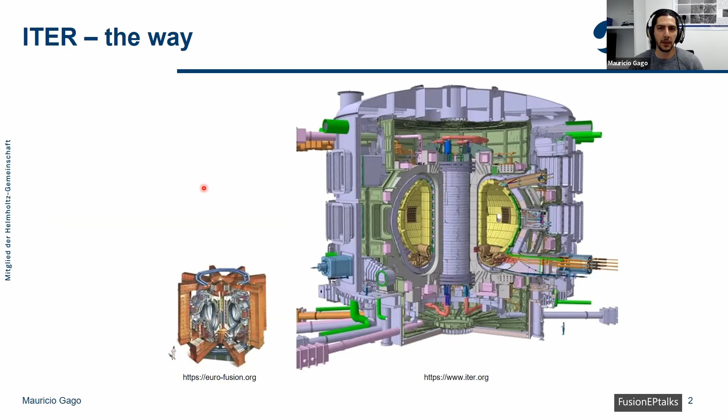And it is expected for ITER to produce 10 times more fusion power than the heating power it consumes, being the first reactor to have a net power gain.

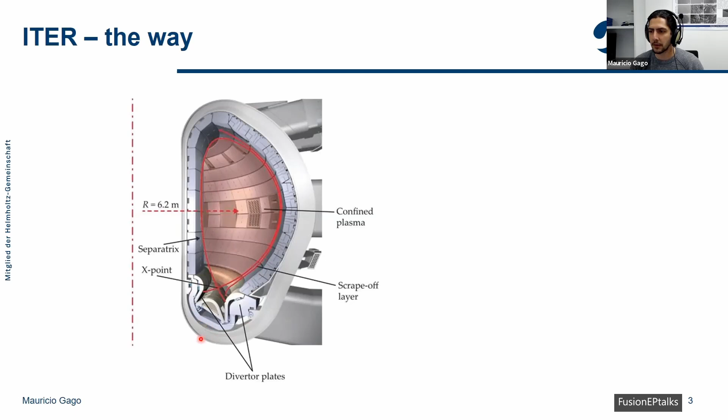Inside the reactor, we will have the plasma being contained, which will be at around 150 million degrees Celsius. In order to regulate these heated particles inside the reactor, the magnetic field will be configured such that excess particles and heat can be extracted by causing them to hit the zone here, which is known as the divertor. This will cause the divertor to be the area where the plasma-facing materials are exposed to the highest loads inside ITER and inside most reactors, in fact.

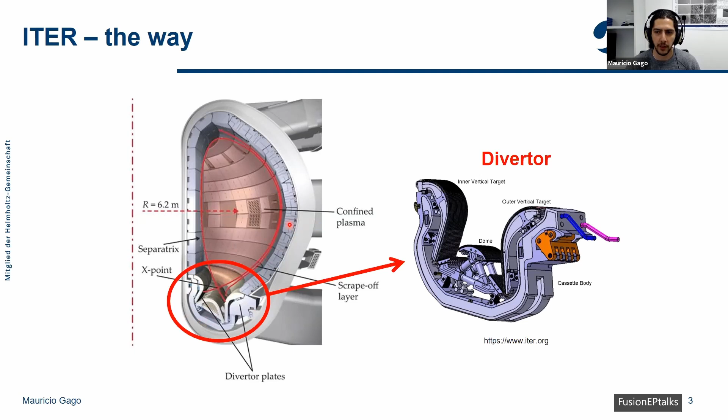Because of this, we will have very high loads. And this requires the material used for this, the plasma-facing material as it would be called, to comply with strict requirements, such as, first of all, having a high melting temperature and a high thermal conductivity, having a low tritium absorption and sputtering yield, being available and not being too expensive, such that it would be prohibitive. And also not producing any long-lived transmutation products, which is also important.

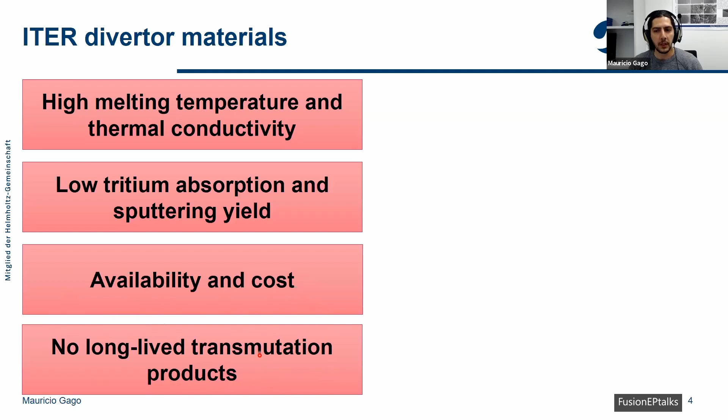This is so that we don't produce as much radioactive waste as possible, and that we can also store it only for 100-200 years, and then it can be reused. Of all the available materials, tungsten is the only one to comply with all these requirements, and it is therefore the material chosen as plasma-facing material for the ITER divertor.

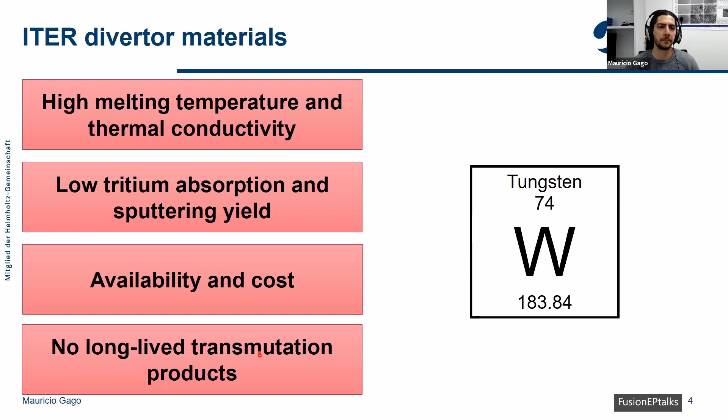So once inside ITER, we will have very high heat loads. ITER will function in pulses, basically of around 450 seconds. During these pulses, we will have slow transient events, which will have from 5 to 20 megawatts per square meter of power density. And then we will also have regularly edge-localized modes, or ELMs, of up to 1 gigawatt per square meter.

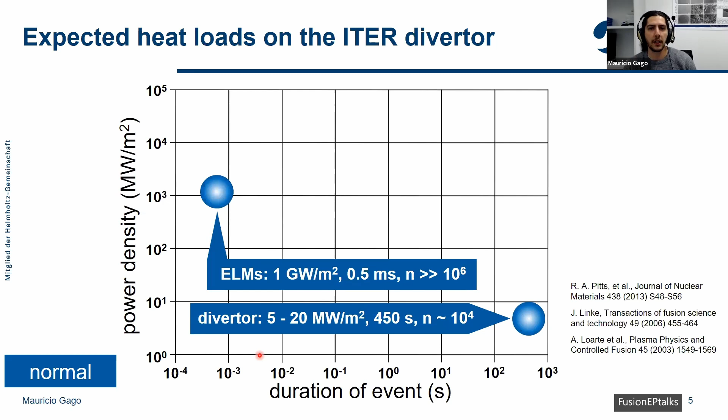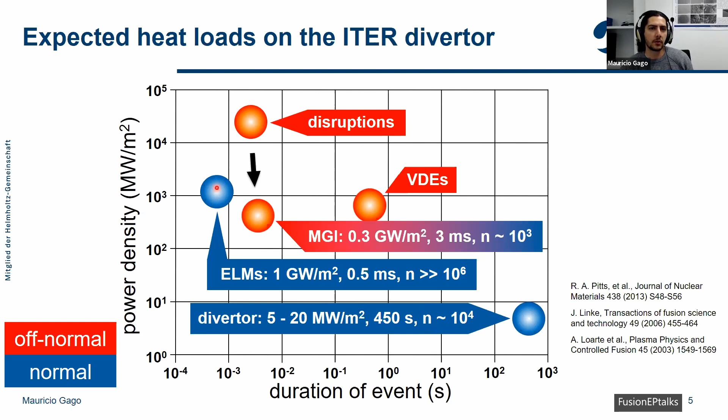It is expected for there to be millions of these events during the lifetime of the divertor. Also, some off-normal events are expected to occur, such as vertical displacement events and disruptions seen here, which can also be mitigated in some ways. But for now, we will concentrate mainly on the ELMs, which are expected to be the loads that will affect the divertor the most.

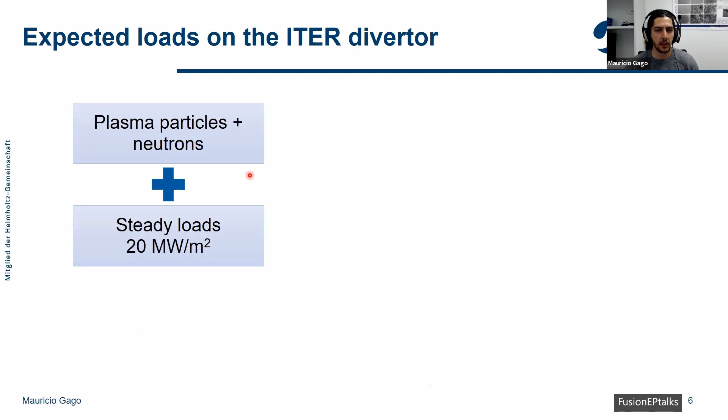I like putting these numbers into perspective. First of all, we will have highly energetic neutrons and plasma particles that can modify the lattice structure and the composition of the material. Aside from this, the slow transients produced during normal operations in ITER will subject the divertor to up to 10 times the loads as in a spaceship re-entering Earth.

Additionally, we will have the transient loads that I mentioned before from the ELMs, which will increase the surface temperature by more than 1,000 degrees in less than 1 millisecond. So these are very, very high loads that we're expecting the material to sustain.

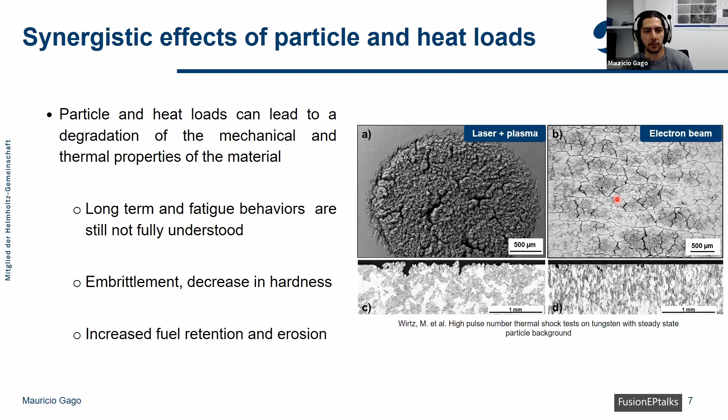So to better understand how PFMs, or plasma-facing materials, in the ITER divertor will be affected, we need to simulate the conditions inside the reactor as realistically as possible. But up till now, no device can completely simulate the loads expected in the ITER divertor. But we can get close, or at least as close as possible.

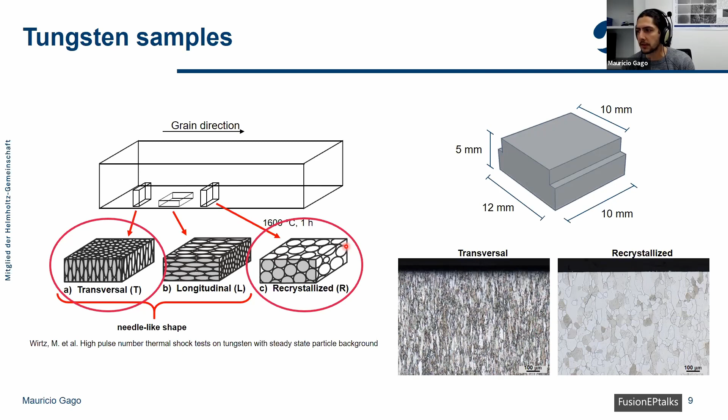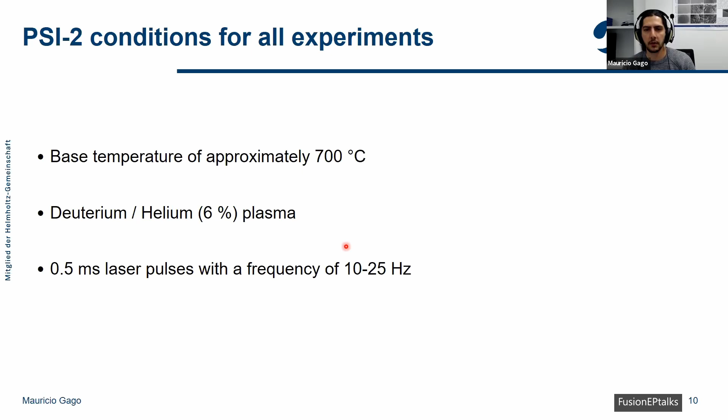So I would now like to give you an overview of the effects of ELM-like events on the material, depending on the power load applied. This will be done simultaneously with the plasma loads first.

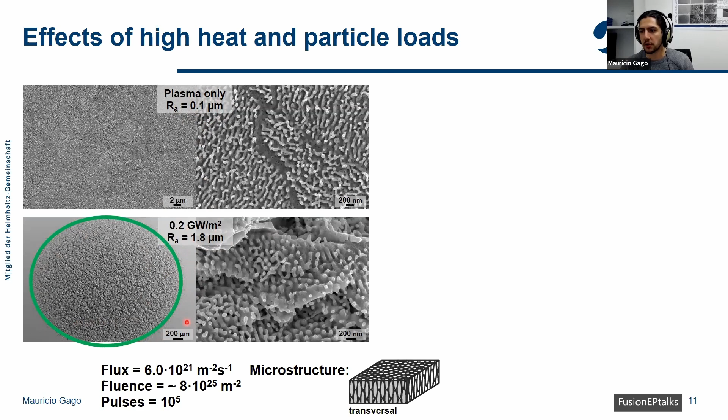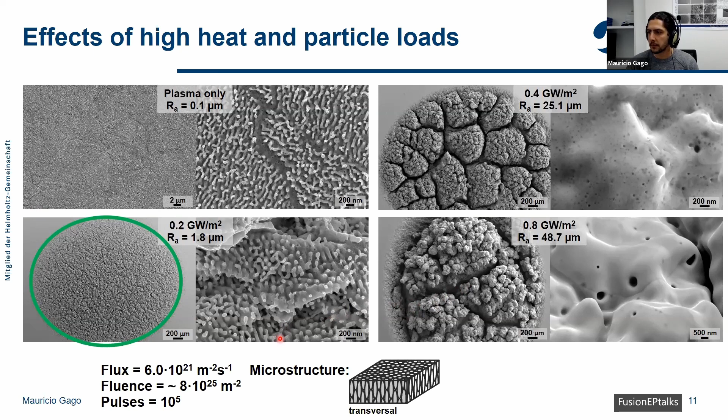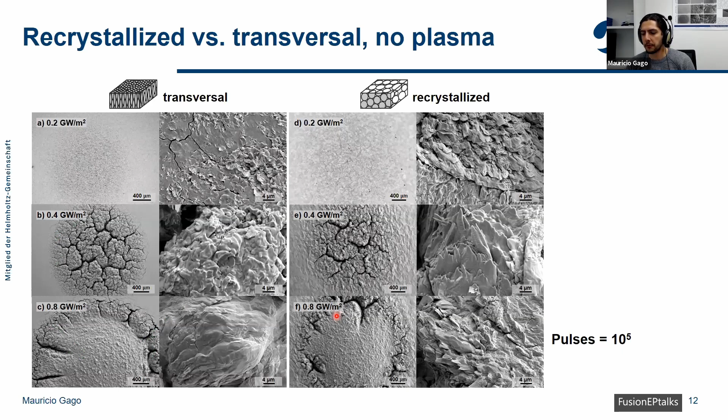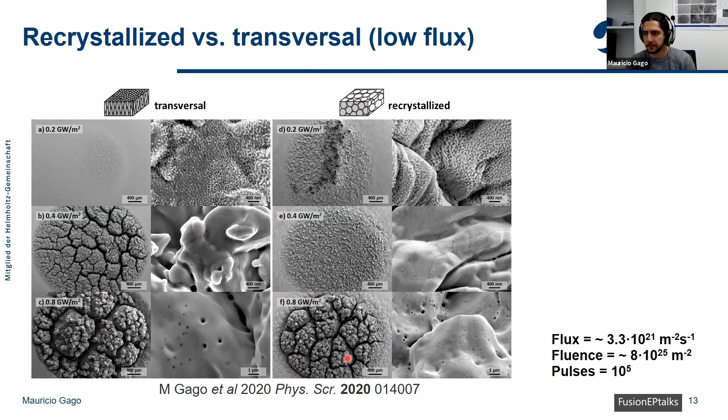If we increase the plasma flux, we see other effects taking place. Comparing high flux and low flux exposure is very important, because in ITER, the total fluence is expected to be several orders of magnitude larger than what we tested with these samples. This means any effects from plasma exposure should be exacerbated during full DT operation, that is, deuterium-tritium operation.

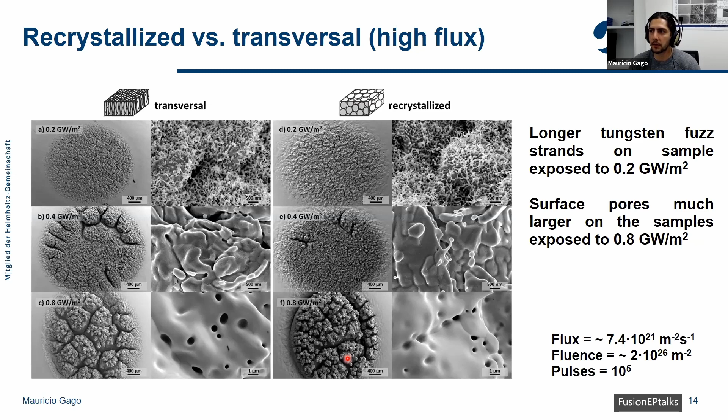This means once the reactor is actually functioning at its full capacity. But we can already see some differences between these two fluxes or fluences, so let's compare them more closely.

We see that at the lowest power load, comparing low flux and high flux, the fuzz formed is actually much higher, or at least much longer, for the high flux samples.

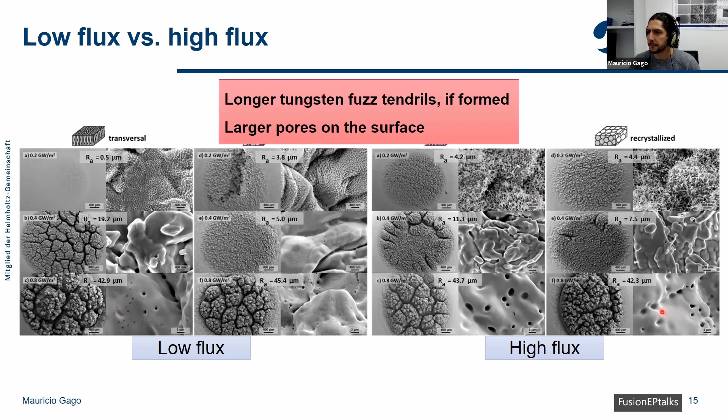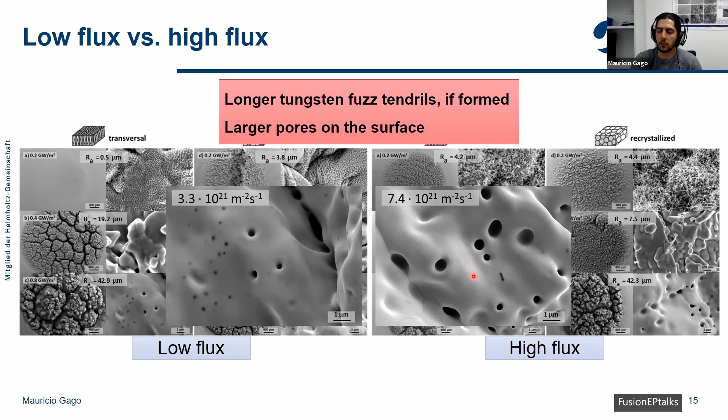At the highest power load, comparing the size of the bubbles or pores being formed, we see the pore size is much larger with higher flux. This means that if the fluence is several times higher in ITER, the pores could be expected to be even larger, which is an important factor to consider when analyzing how the material will behave.

Another process taking place during the tests is recrystallization. As I mentioned before, it is expected in the PFMs, and we can see that during these tests as well, on the areas affected by laser, recrystallization is taking place, and this does not happen in the areas affected only by plasma, for example.

So it's merely an effect of the heat loads, especially that the areas affected by the laser at higher power loads, 0.4 and 0.8 gigawatts per square meter, the surface temperature increases, and at some point during the temperature peak, the temperature of the samples is higher than the recrystallization temperature of tungsten, which is about 1,300 degrees C.

We can see there, also because of the plastic deformation taking place during this expansion and contraction, different effects taking place, such as grain nucleation, plastic deformation, and also recrystallization. So we see a lot of smaller grains being formed in both samples, and then also some larger grains being formed, especially on the surface, even at the lower power loads.

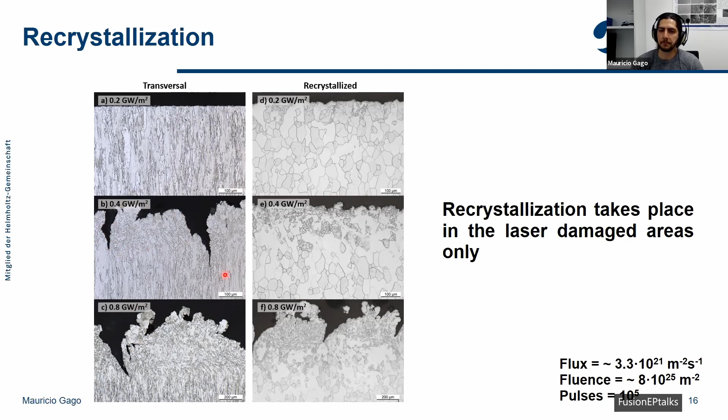Now, as I mentioned at the beginning of the presentation, the amount of ELMs expected for the ITER divertor during its lifetime is in the millions of events.

Up till now, I have only shown a number of pulses of 100,000, but then it's also interesting to know how PFMs will behave after a higher number of ELMs.

So also due to time limitations, the frequency of the pulses had to be increased, and because of this, if a higher power load was applied, the temperature of the samples would increase way too much, even the base temperature, so this wouldn't have been able to stabilize.

And then a power density of only 0.2 gigawatts per square meter was used, so only the lower power density that has been used up until now, for these high pulse number tests.

But still, this is very important because one of the plans to mitigate the effect of ELMs is by ELM pacing, which means that ELMs will actually be happening more often, at a higher frequency than for unmitigated ELMs, but they will have a lower power load.

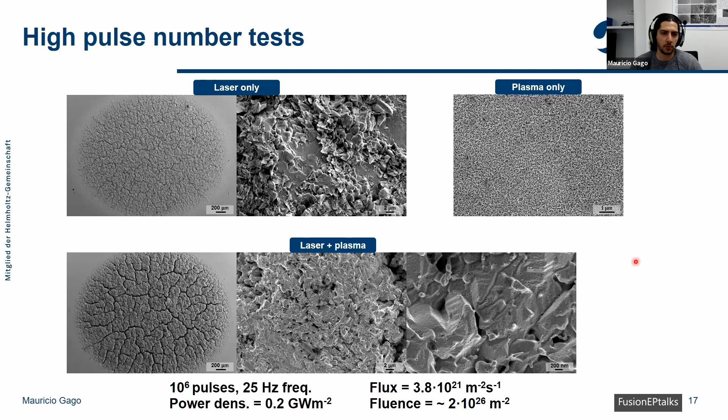But then again, also this time no tungsten fuzz was observed, for example, and no really large cracks were observed as in previous tests with higher power loads.

Now, another phenomenon that was observed that I think is very relevant for PFMs in the ITER divertor is that of bubble formation. So on the surface, for the samples exposed to plasma, we could see that there are pores being formed. And if we perform a focused ion beam cut of the samples, we can see that there are bubbles being formed also underneath the surface.

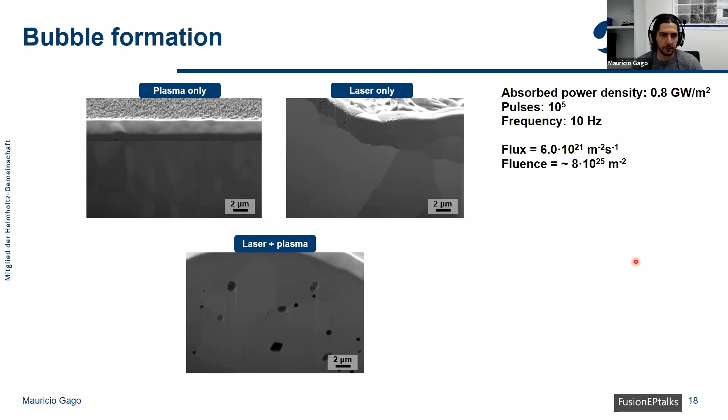And we can see here that this doesn't happen when we apply only plasma or only laser, so this only happens when we apply laser and plasma. And as we will see later, in the samples exposed to 1,000,000 pulses even, we also don't see any bubble formation here.

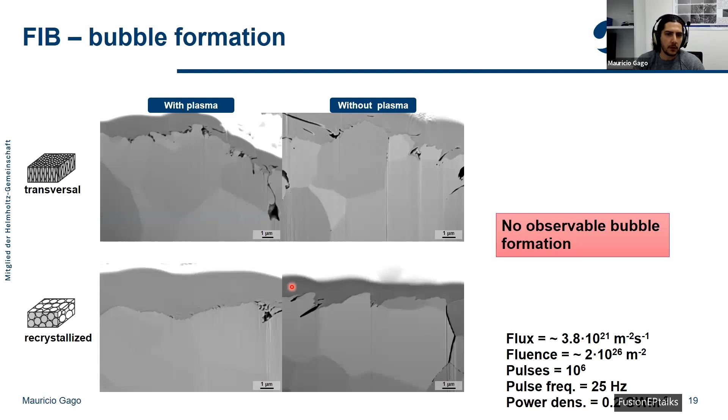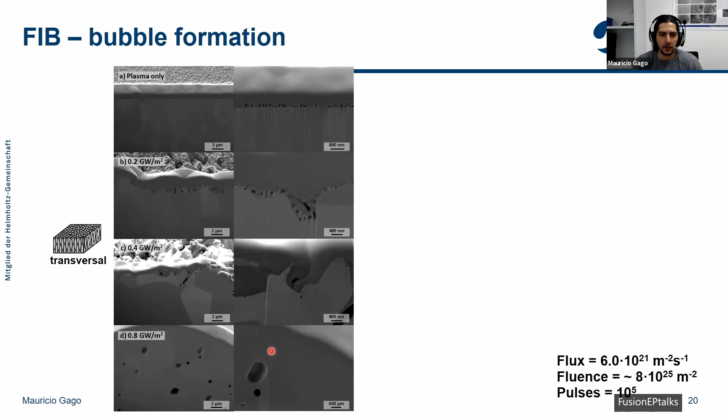And we can expect the size to be even larger with a higher plasma fluence. As we saw, the pores also increase in size, so I would say that most probably the size of the bubbles also grows underneath the surface with a higher fluence.

In these samples, we can already see that the amount of bubbles on the surface is very significant. Actually, analyzing this image, for example, we see that the bubbles occupy 3% of the analyzed area.

And how this affects the material behavior is still not completely clear, but if we have more pores, this will at least affect the heat dissipation. And this is already very important because then the surface will always be warmer than expected.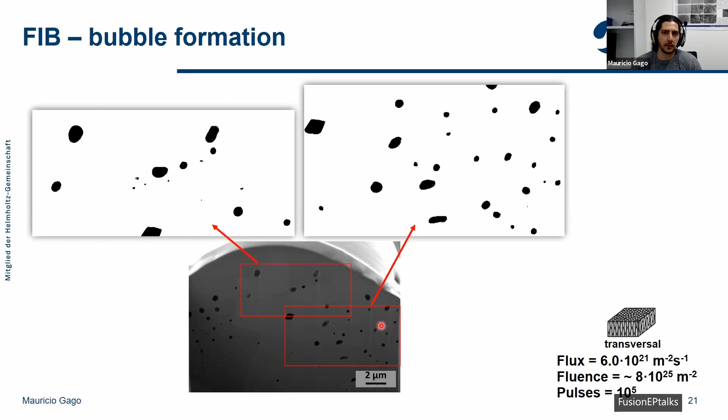So as I mentioned at the beginning, we saw that for some samples, especially at lower power loads, the transversal samples have a higher cracking threshold than the recrystallized samples. This has also been seen in previous tests.

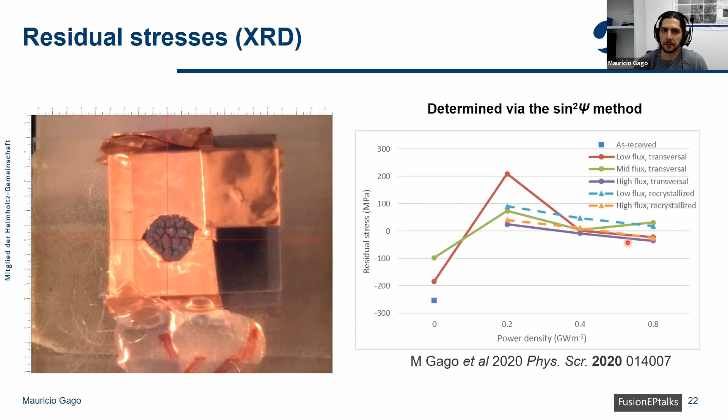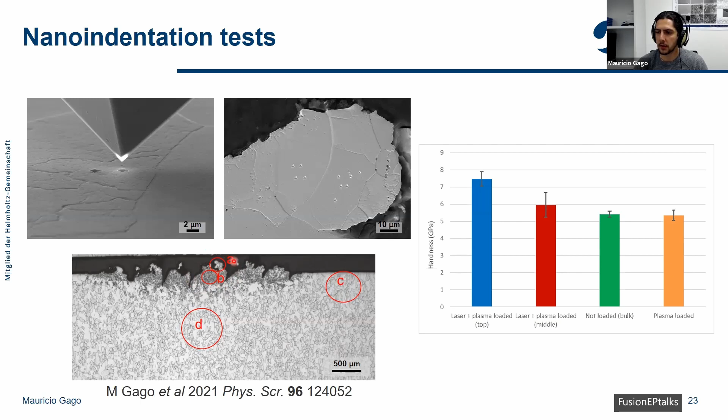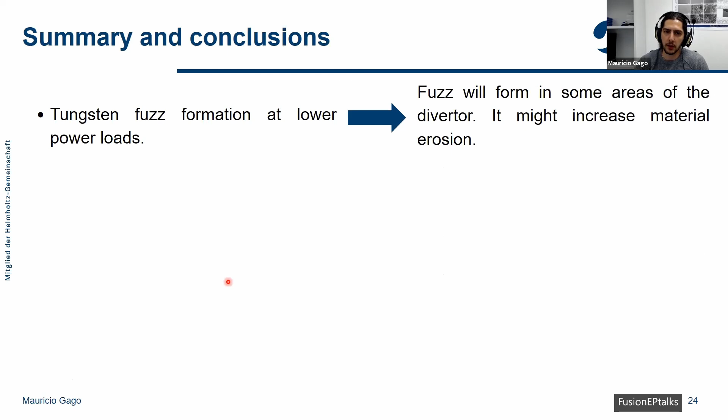So to conclude, we expect tungsten fuzz formation at lower power loads. This means fuzz will form in some areas of the divertor, and it might also increase material erosion. Then high heat loads increase surface temperature and allow bubble formation, and plasma fluence increases bubble size, so bubble formation should be expected in the divertor.

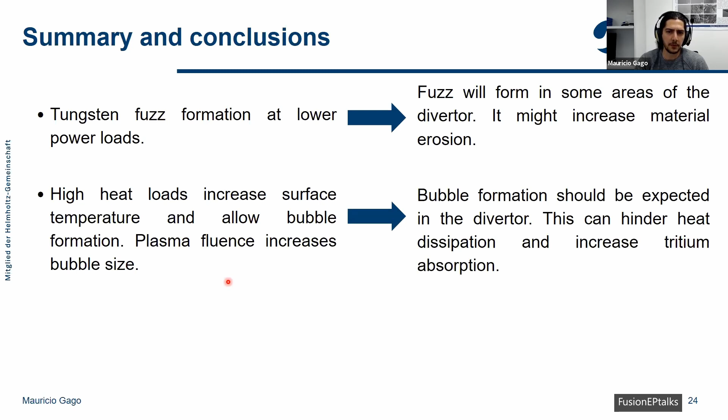This can hinder heat dissipation and perhaps even increase tritium absorption. And then recrystallization and cracking at expected ELM heat loads is to be expected, and mitigation of transient events might be necessary.

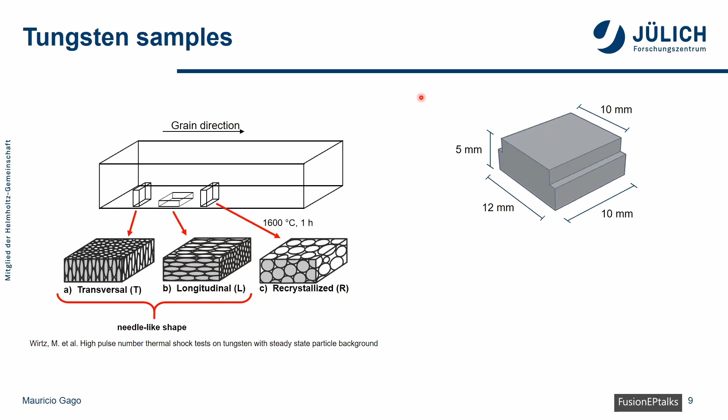Not really methodically. I do know that in these conditions, because other colleagues have tested this, I cannot give you numbers, but I know that at these temperatures that we are using, the tritium or deuterium retention is very low. Actually, most tritium retention experiments, because of this, are done when samples are exposed at 200 degrees C or more. But yes, as I said, I cannot give you really clear numbers.